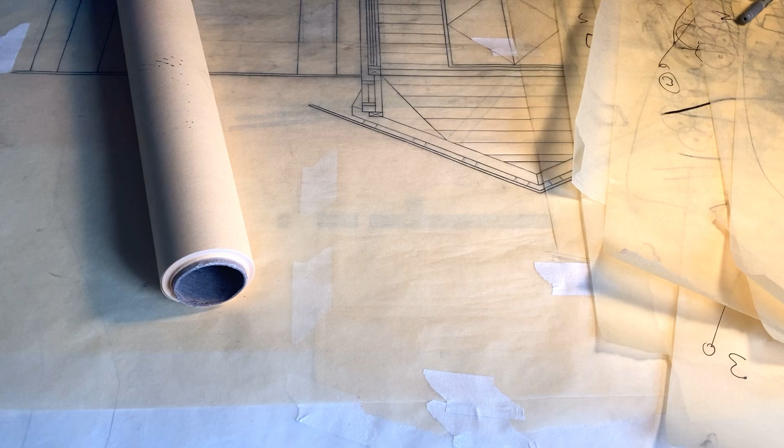Hey guys, Josh here. I'm a Part 1 architecture assistant, and I'm here to talk about site context for a project that I have been working on outside of my general day-to-day office duties in practice. So this is a conceptual project, but it has real parameters in that the site exists. I went and stayed on the site a couple of months ago for a period of 6 weeks.

We are based in the Caribbean, on an island called St Lucia, which is a pear-shaped, small rainforest-covered island in the Caribbean. The site itself is on the southwest coast of the island, so it's somewhat protected from a lot of the harsh Atlantic winds that come over from the east, but it does still receive quite a lot of high wind and a lot of risk whenever there's hurricanes around in the season.

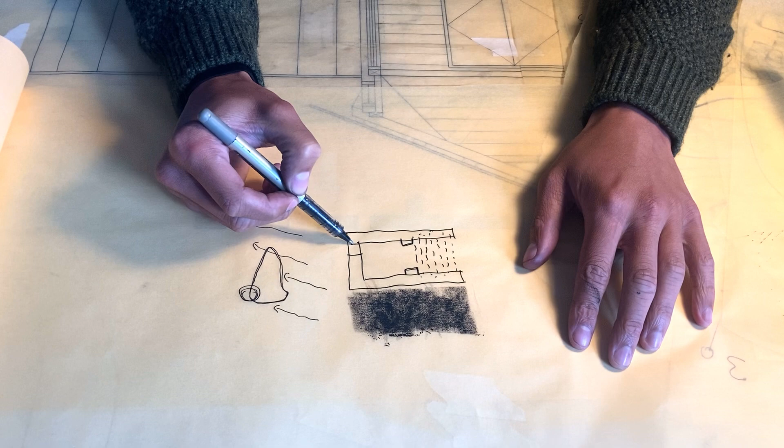So this video is just to explain why I've decided to base a new building in the way that I have, and I hope it's clear. So the site itself at the moment is 3 existing stone walls that are covered in a canopy of bamboo, which I presume is locally sourced, with some basic structural columns, a couple of window openings, and a larger door opening. All the openings are empty, including the main entrance, which is

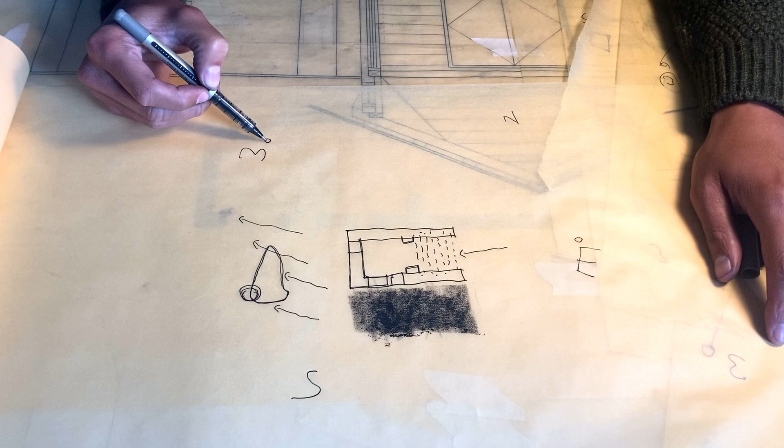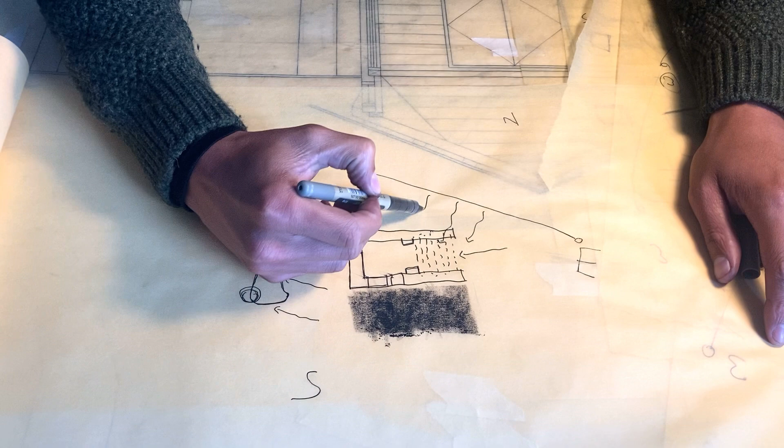from this direction. So the site and the building is orientated on an east to west axis. So you've got your east point, which is here, and your west point, which is roughly over here, and then you've got north, and south over here. This means that the sun rises over here and sets in the west, just like here, and it means that over the course of the day, the existing 3 stone walls, the ruin, which is what it's locally known as, receives a lot of sunshine into its premises all throughout the day, creating a really nice, serene, peaceful place to be and stay,

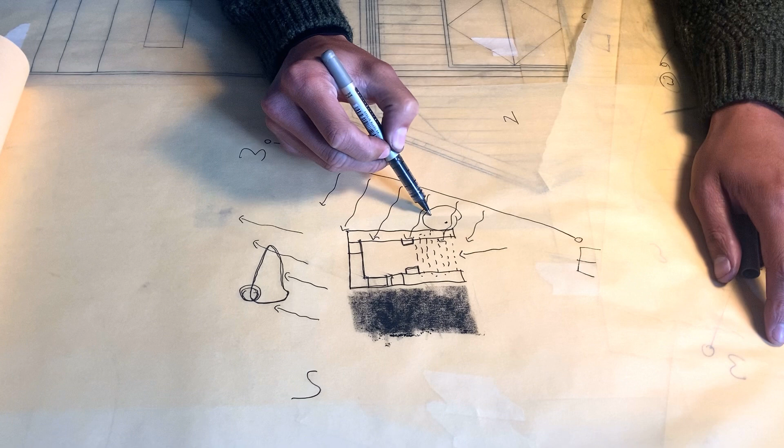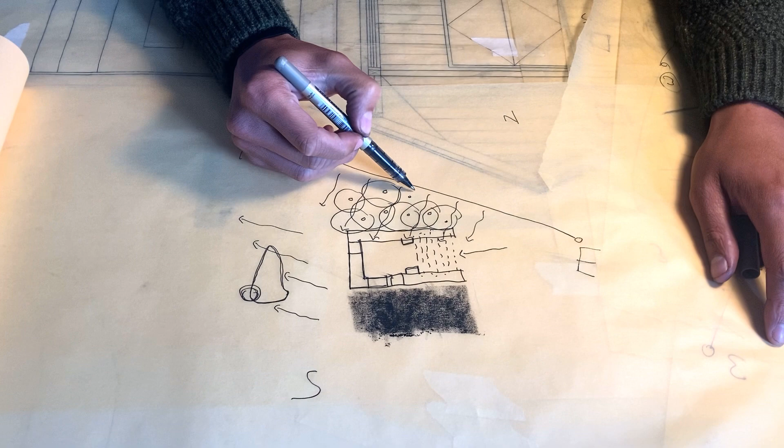particularly as you've got lots of vegetation in the form of some trees and plants, which creates a kind of natural canopy and shading, which actually makes the place bearable, because if you didn't have these here, then throughout the day, particularly during the dry season, it would be almost unbearable to spend any time in here. So these trees actually serve a really great purpose to keep this small site comfortable and bearable. The site sits on a much wider estate, which is run by a building which is sited around here, but is more like around 100 or so meters away.

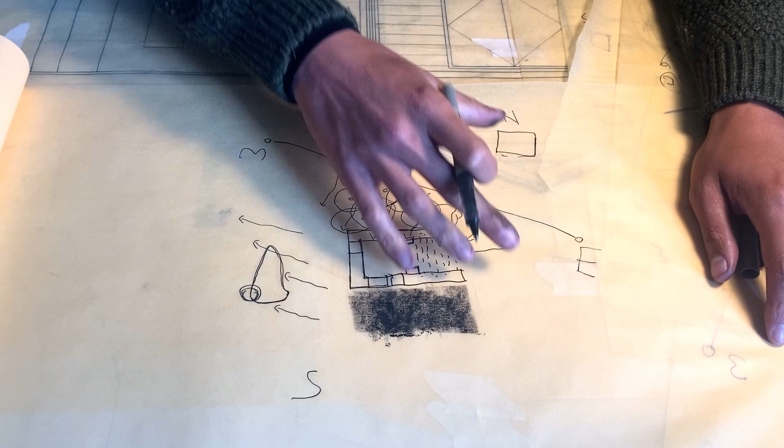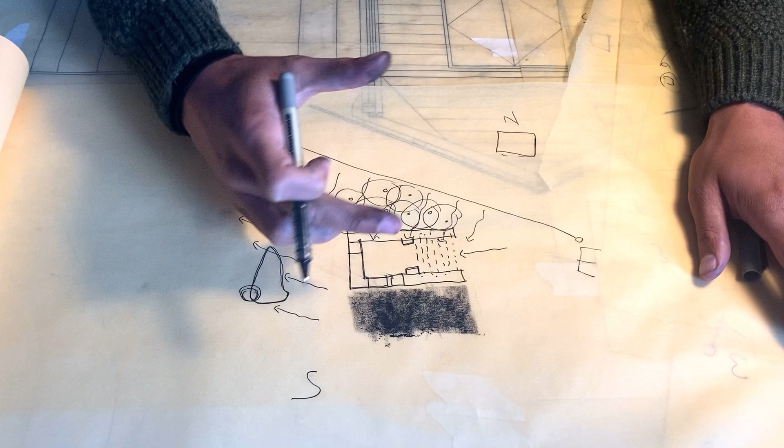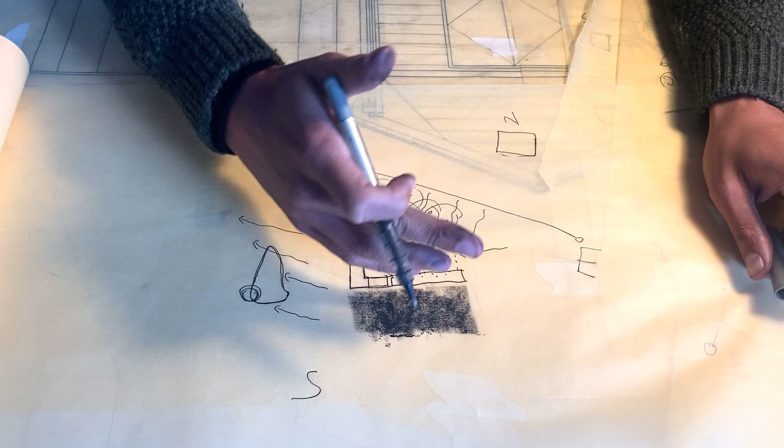The program for this new site is swinging between the idea of a museum to showcase the wider area and the history of the place, mixed with a cafe and a residential unit to allow people to come and stay. And so after staying at this place, I've come away and thought about how you could activate the site in different ways, how you could bring people in, the community in, but also focusing on how people can live on the site without harming or interrupting what is already there.

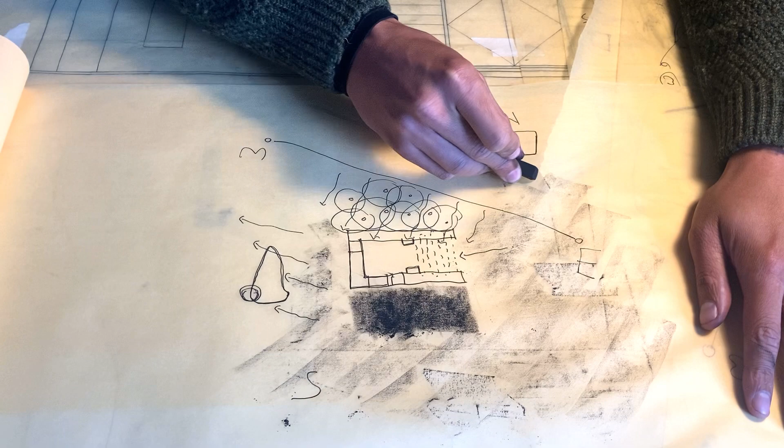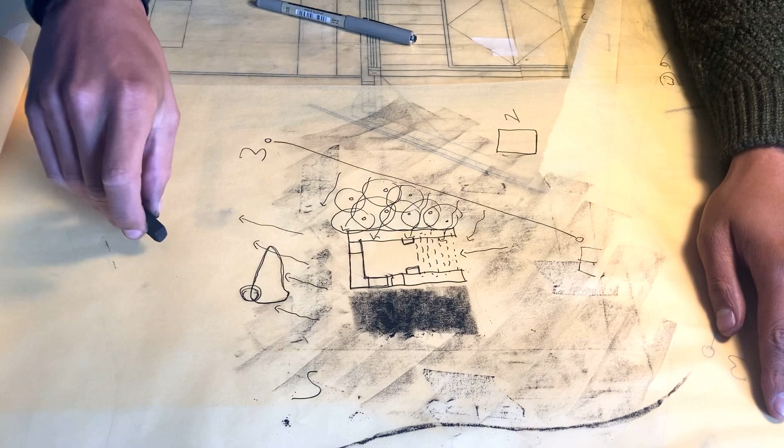Some other wider things to consider are what the terrain is like. So the majority of the land around is just basic grassland. The site is predominantly flat with no real harsh visible gradients, which makes things a little bit easier, but not to be taken for granted, and also not to be taken lightly. There's also a somewhat harsh drop at this point here, but this is comfortably far enough away from the site that I don't consider this part of the site, but you've got the edge of a rainforest around here, which this project does not interrupt or include, but it's just good to mention.

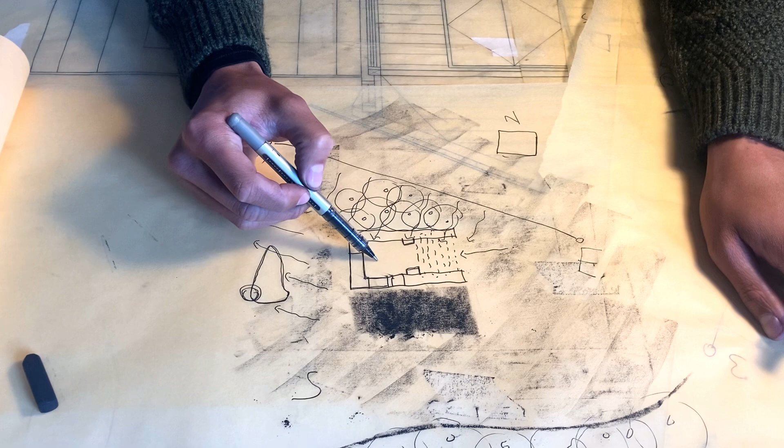There's also views out towards the sea on this side, which is something to really think about and make use of, how to open up this side of the project. And as briefly mentioned at the start of this video, the site does receive a lot of wind, varying at different parts of the year, normally coming from the east, where the Atlantic Ocean is.

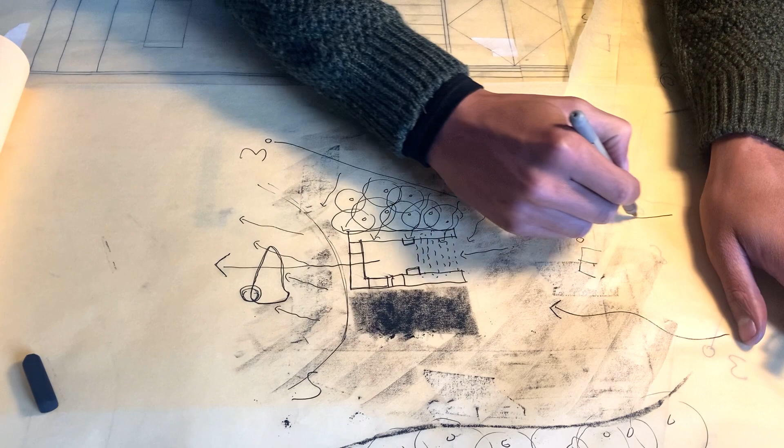And so in thinking about which way to orientate a building, the sun and the wind are two of the main dominating factors here in deciding where or if or how one should approach placing a new building to create a different experience to what is already here, and to uplift and celebrate what is already here as well.

But I will talk about the design concepts and features in some forthcoming videos. Just to touch briefly on the placement, the way I'm approaching the project is a new building that could be positioned directly adjacent to the existing building.

Some reasons why are that anywhere else would be interrupting. If I look at this area of the site to place something new, perhaps a new entrance into the ruins or something along those lines, then I think this part of the site is already being used quite heavily by groundsmen, children, people that are staying on the site. The grass is really well kept and looked after. And so I don't want to introduce anything here that might interrupt this already really open and fresh space.

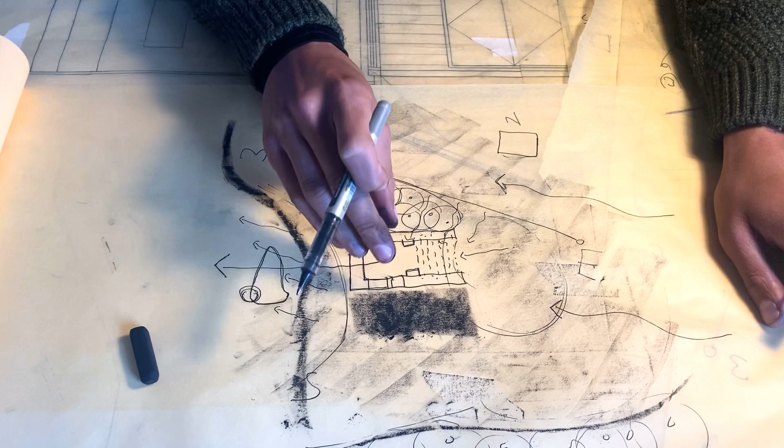If I move on to this side here, then we're starting to interrupt the trees. I mentioned at the start of the video that these trees actually give a really nice natural canopy to the site. So without these here, there's a lot of harsh light getting into the depths of the building. So in keeping a building on this side adjacent to the ruin, it means that there's already a natural element of shading coming in from the trees and the ruin into the building.

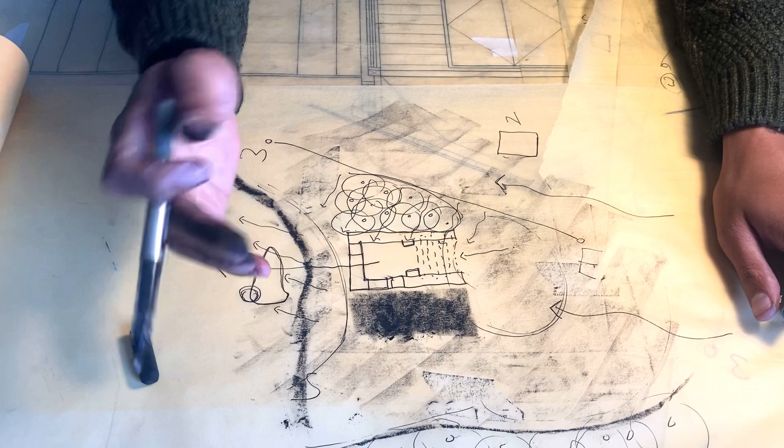So there's less need for architectural elements that are there to bring levels of sunlight down or shading. If anything, I can afford to think about an architectural building that really celebrates the light that is coming in, which is already kind of distilled and fragmented.

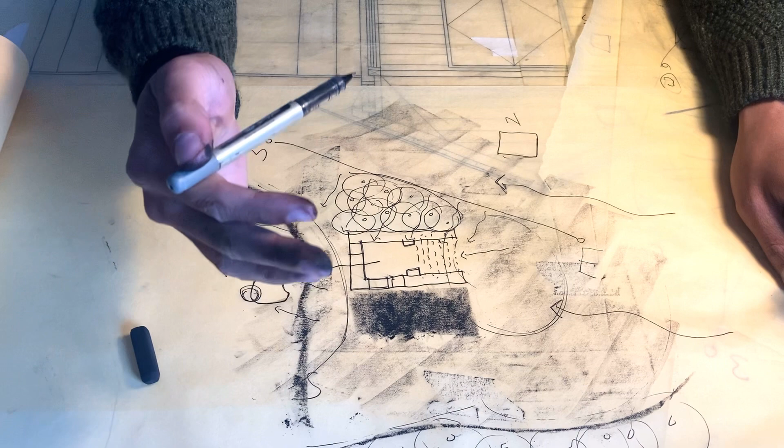Also, if I orientate the building on this side or propose something that is orientated in this direction, then there's a lot of opportunity to make use of ventilation and natural wind coming in, reducing the need for technology or complications where you're trying to maximize a limited amount of ventilation. So I don't want to create a building that hides away from these elements. I want to design something that really brings air in and celebrates that.

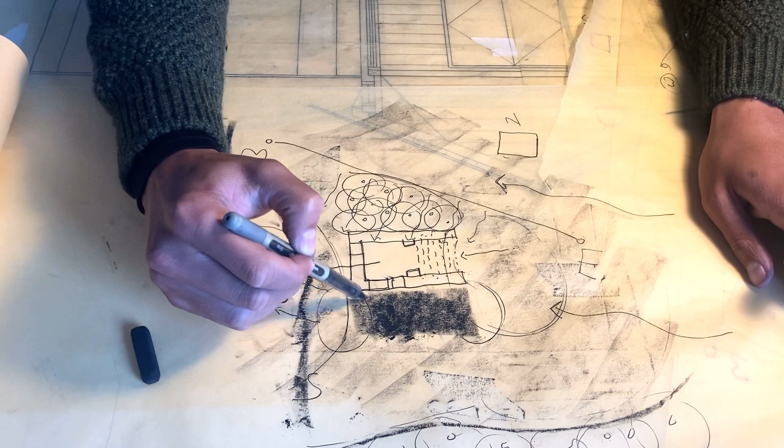So designing a building with openings on these sides so that lots of air can get in throughout the day and cool it down at night time so that it's more bearable for people to sleep and stay and eat. And as well, placing the building on this side, I'm thinking about concepts of sharing the ruin wall.

So just to round up this video, my thinking is to propose something where there are structural elements involved that allow the user and inhabitant of the building to experience the materials of the stone wall, to be able to touch and feel the presence of that, how you would if you were in the ruin today, experiencing the peacefulness and the tranquility that's already there, but in a way that doesn't harm the ruin building or put pressure on the ruin wall structurally.

So in the section and the plan, we'll talk a little bit more about how I'm going to approach that, but this is what I'm working towards at the moment.